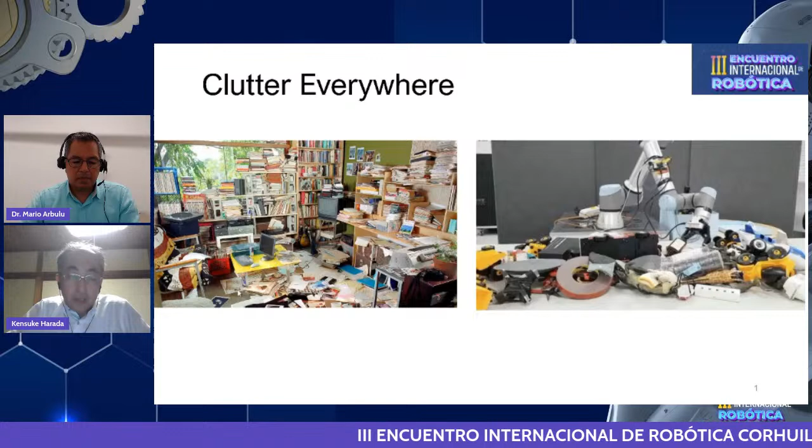Okay, so thank you very much for the kind introduction. It is my great honor to present in this conference. And today, I would like to present the robotic manipulation in clutter. And as we can see from this picture, there is clutter everywhere in our daily life. And if a robot is going to work in daily life, robotic manipulation in clutter will be a crucial technology.

And in this research, we especially focus on the industrial application of manipulation in clutter. And we can focus on two topics. One is in the assembly factory, and in the assembly factory, the parts will be delivered from the parts production company, where the parts are randomly stored in a container. Then the parts are supplied to the assembly cell. To automate the assembly process by a robot, the robot has to deal with picking parts randomly stored in the container.

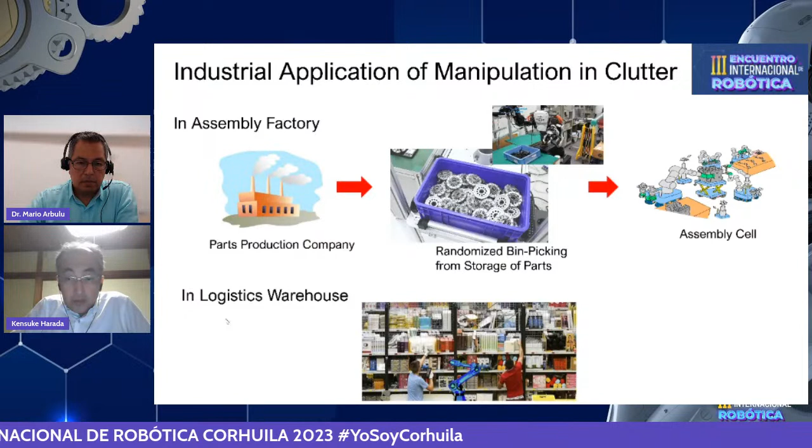And as a second example, we can focus on the logistic warehouse. In recent years, like Amazon, e-commerce is getting more and more common. And in a logistic warehouse, the items are stored in a shelf, and in many cases, the items are stored randomly on the shelf. And to automate the operation in a logistic warehouse, the robot has to deal with the clutter of items stored in a shelf. So this talk is divided into two parts. One is the clutter in the assembly factory, and the other is clutter in a logistic warehouse.

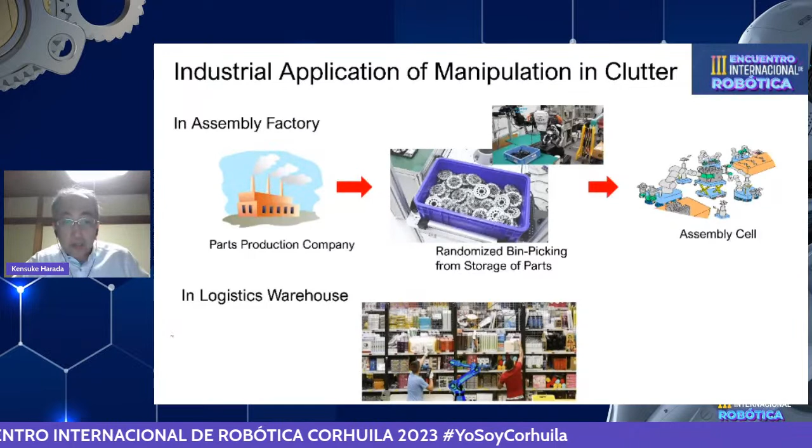And this is the contents of today's talk. In the assembly factory, we focus on picking mechanical parts from a container. And we explain three topics. One is learning action affordance to deal with entanglement. Second, we introduce a learning approach on picking wire harnesses. And third, we introduce the feedback approach on picking wire harnesses.

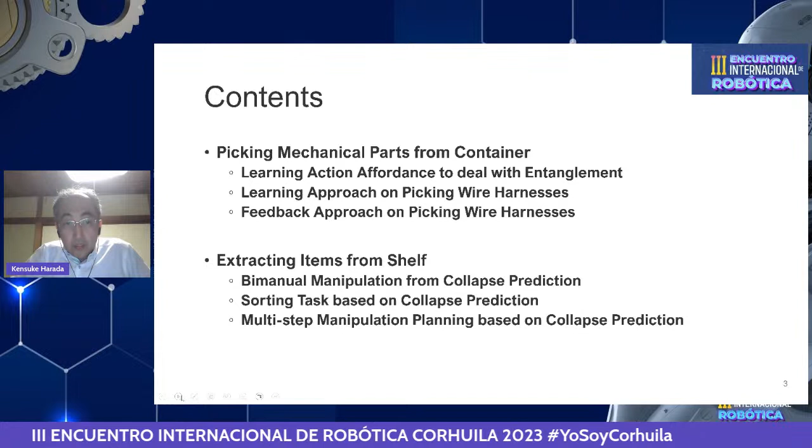And on the other hand, to extract items from the shelf, we first introduce the research on bimanual manipulation from collapse prediction. Secondly, we introduce the research on sorting tasks based on collapse prediction. And thirdly, we introduce the research on multi-step manipulation planning based on collapse prediction.

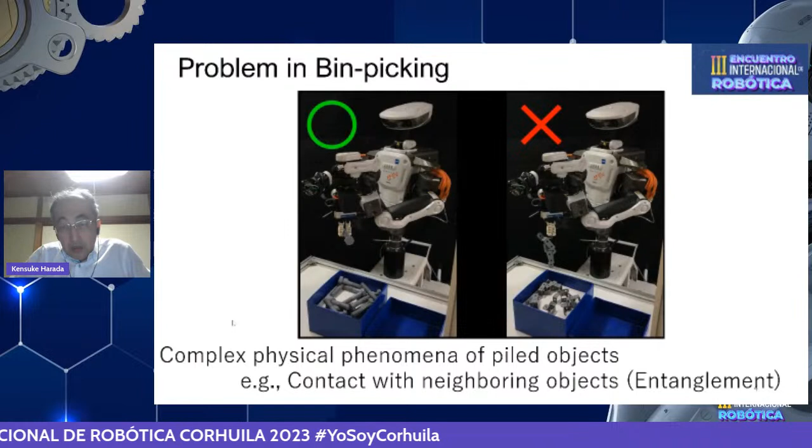And first, let me introduce what is the problem in robotic bin picking of mechanical parts. The physical phenomena of piled objects are very complex, and when a robot picks up a simple shaped object, there is no problem. But when the robot picks up a complex shaped object, the object may be entangled with the neighboring object. So to automate the bin picking task, we have to deal with the problem of entanglement.

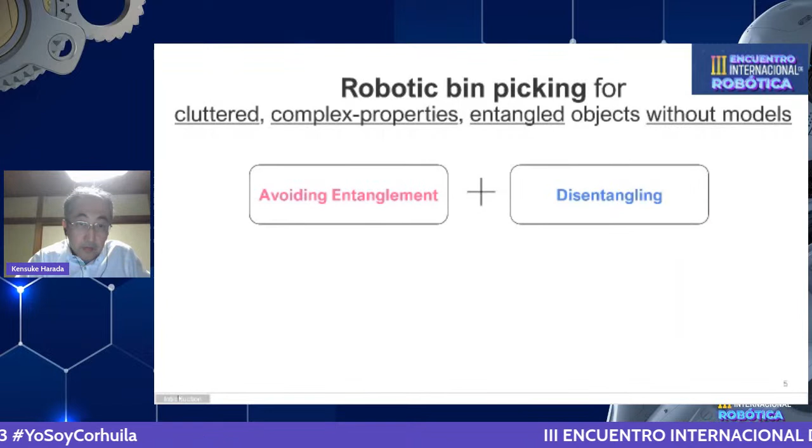So we can summarize the approaches of robotic bin picking considering entanglement. There are two approaches to deal with entanglement. One is to avoid the entanglement, and the other is to actively disentangle the entangled objects. And there are also two approaches: one is the analytical approach, and the other is a learning approach.

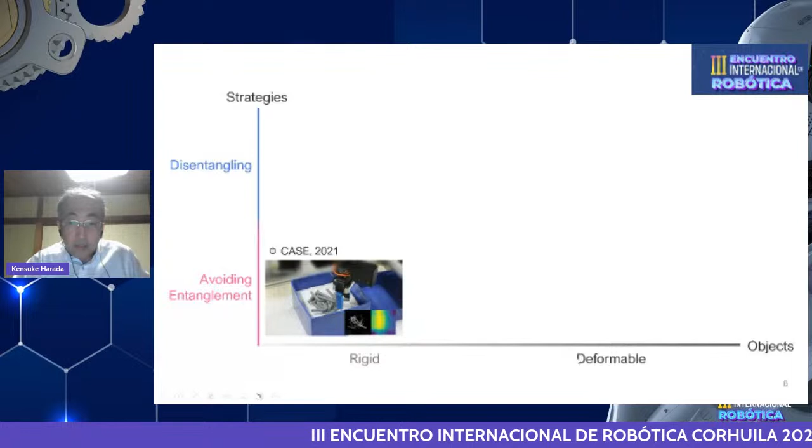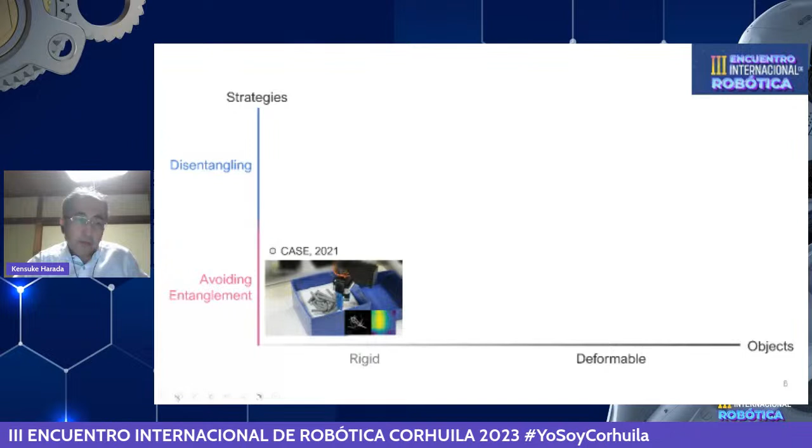And the approaches can be summarized like this. There are two axes. One is the axis on the objects, and the objects can be from rigid to deformable. And on the y-axis, there are two approaches. One is avoiding entanglement, and the other is the disentangling approach. And we have done several researches on these topics, and among these researches, we introduce three of them.

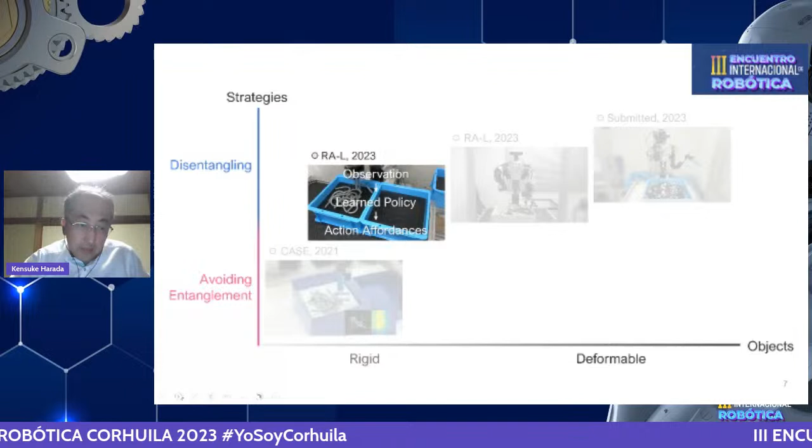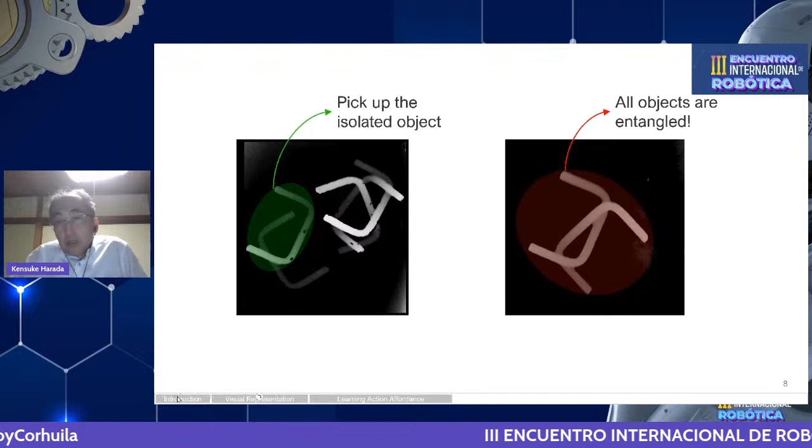And first, I would like to introduce the disentanglement approach for rigid objects. As shown in this figure, the robot can pick up an isolated object if there is one. However, if the robot iterates picking isolated objects again and again, and there is no isolated object, the robot has to pick up an object entangled with other objects. So in this case, the robot has to actively disentangle the entangled object.

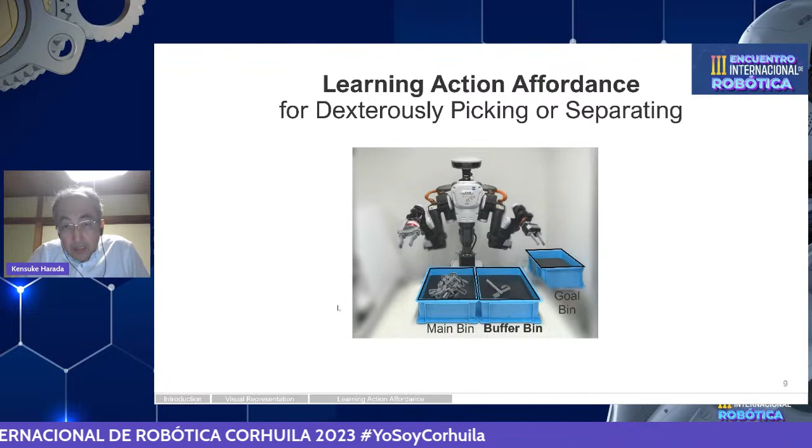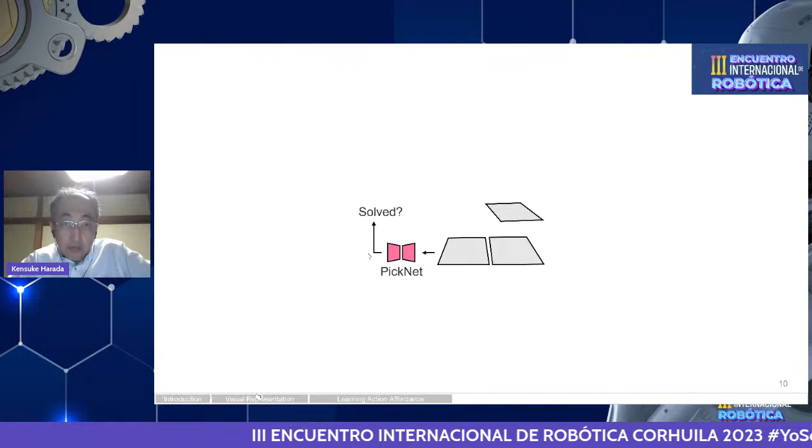So this slide shows our proposed approach. The robot has to pick an object from the main bin, and there are two other bins. One is the goal bin, and the other is the buffer bin. First, the robot picks an object from the bin. Then, by using PickNet, we can estimate the entanglement. If the entanglement is solved, the object is placed in the goal bin. On the other hand, if the entanglement is not solved, the objects are placed in the buffer bin.

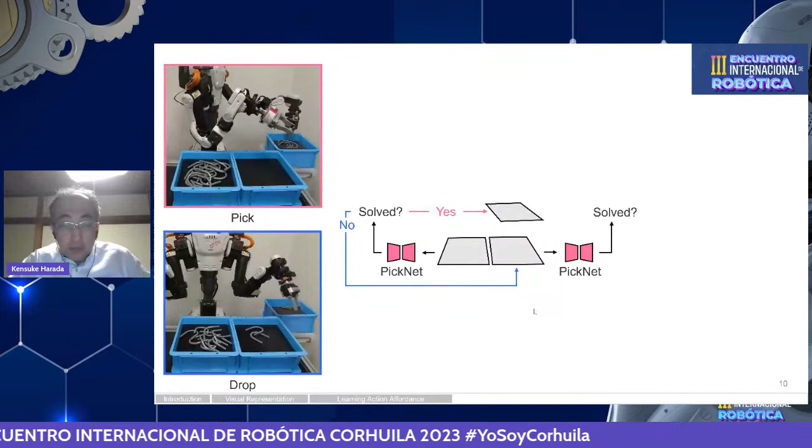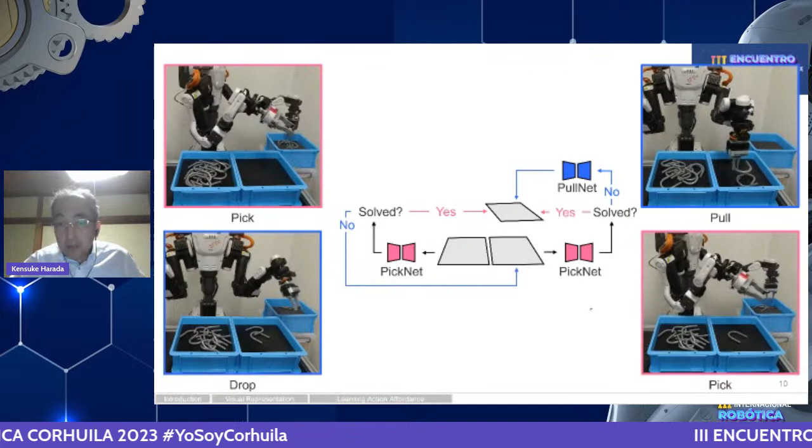In this case, once the object is put in the buffer bin, if the entanglement is solved, then it is put in the goal bin. Otherwise, the robot actively disentangles the tangled object. And this is how to train the neural network. We use physics simulation, and there are two kinds of simulation. One is the picking simulation, and the other is the disentangling simulation.

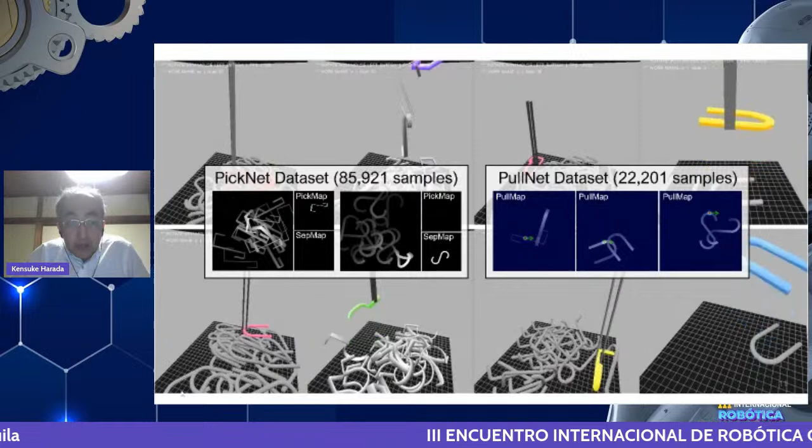And we prepared 85,000 samples for the PickNet, and we prepared 22,000 samples for the PullNet. I'm sorry, the PickNet is the neural network to avoid the entanglement, and the PullNet is the neural network to actively disentangle the entangled objects.

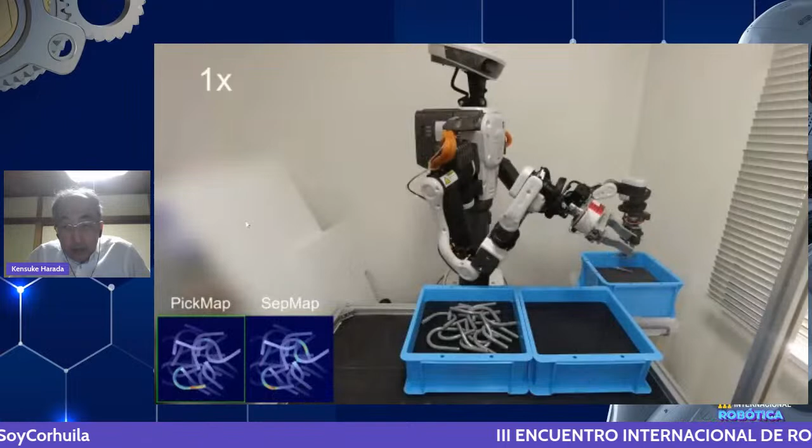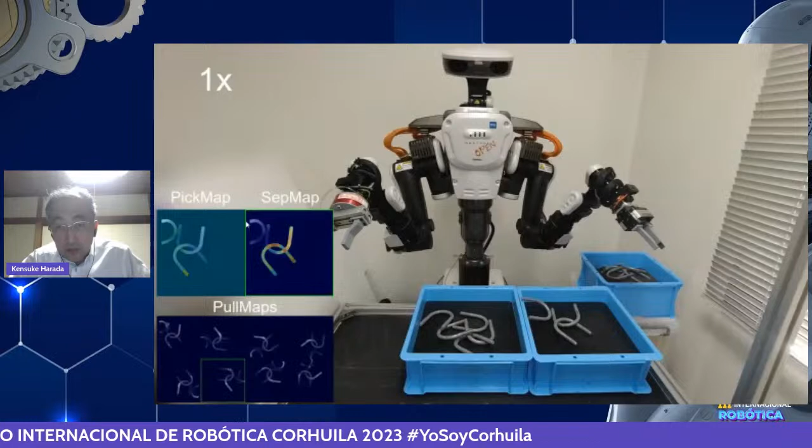And this is entangled, and the entanglement is not solved. Then the robot tries to actively disentangle the tangled objects. And then one of the objects is put in the goal bin. Okay, so we can achieve a pretty high success rate. It is almost 90%.

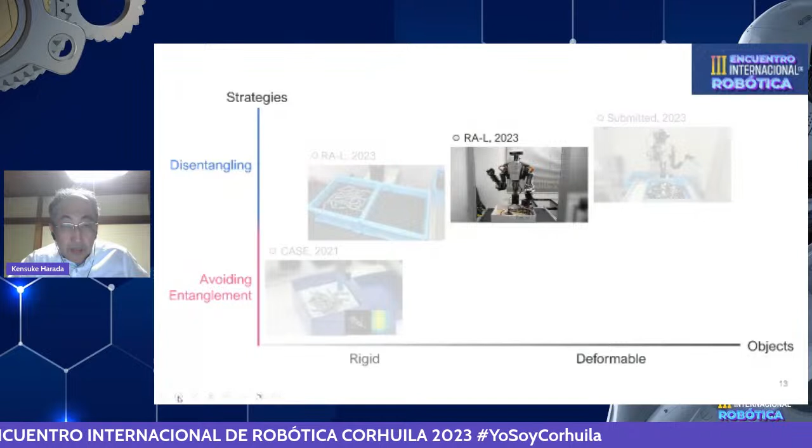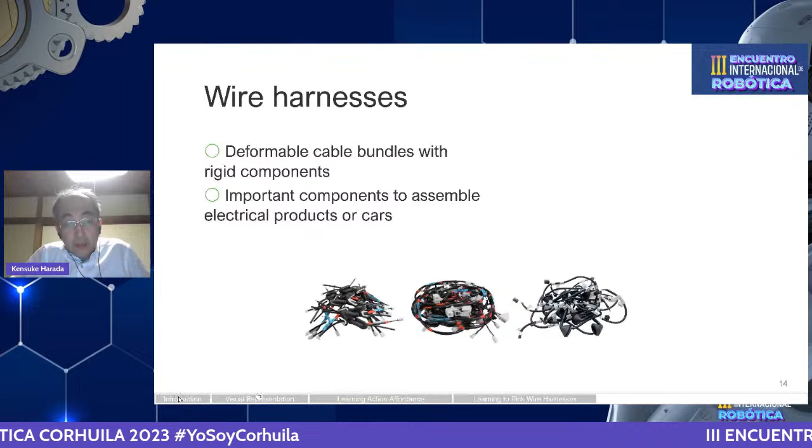Then I would like to present the disentangling approach for deformable objects. So we especially focus on wire harnesses. This is the cable used to assemble a car, and usually deformable cable is bundled with rigid components, and it is an important component to assemble electrical products or cars.

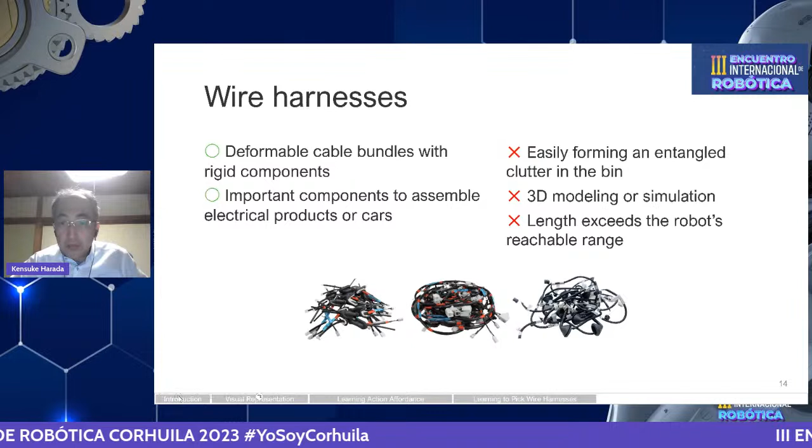But this wire harness is easily entangled, and it is stored cluttered in the bin, and it's very difficult to model the shape of the wire harness, or to simulate the physical phenomena of the wire harness.

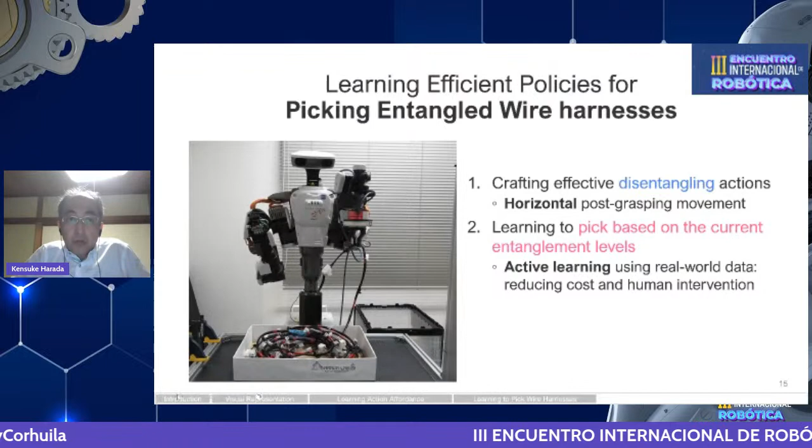And in this research, we try to learn efficient policies for picking entangled wire harnesses. We consider crafting effective disentangling actions, horizontal post-grasping movements, and in the approach, we consider learning to pick based on the current entanglement levels. We use active learning using real-world data, and it reduces the cost and human intervention.

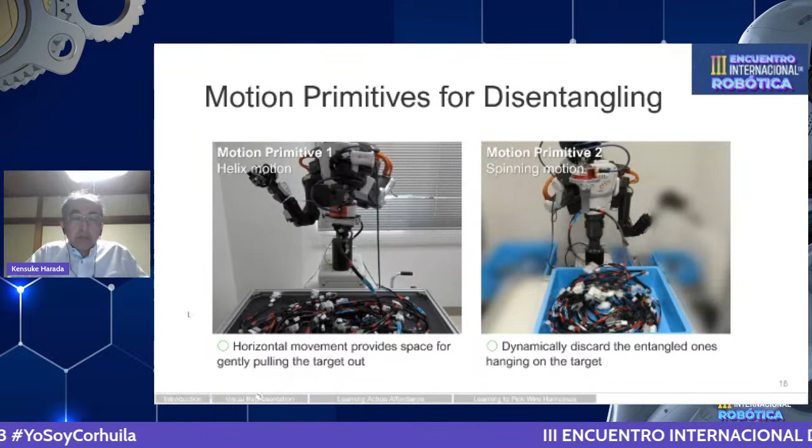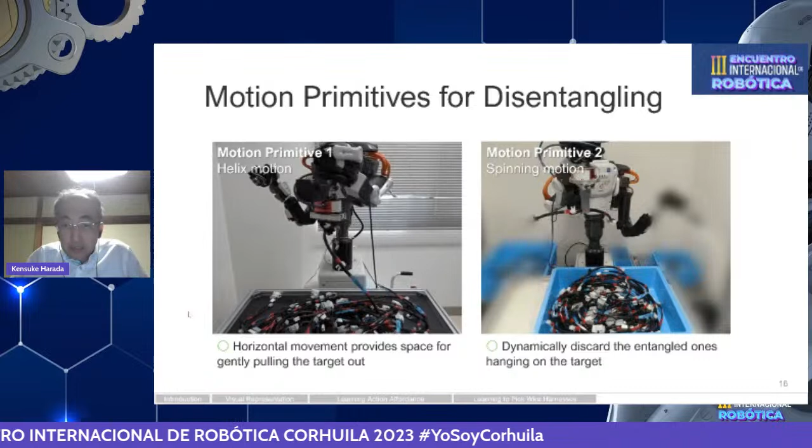And this video shows the motion primitives for disentangling. We assume two motion primitives. One is a helix motion, and the other is a spinning motion. In the helix motion, the horizontal movement provides a space for gently pulling the target out. And in the spinning motion, it dynamically discards the entangled ones.

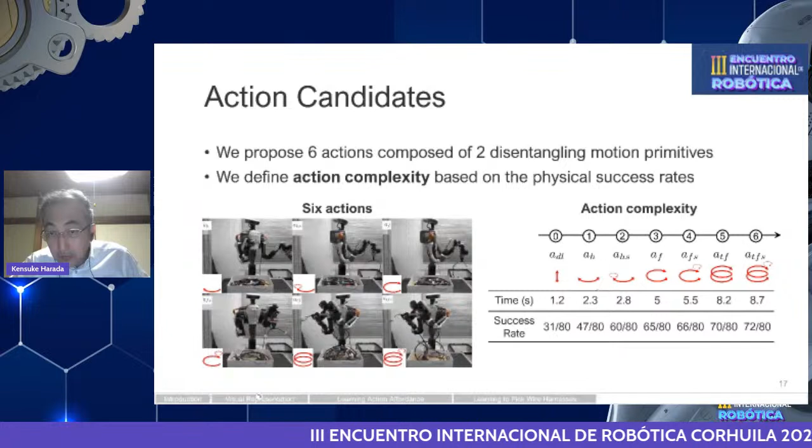And we assume 6 action candidates. So in the helix motion, we assume a half circle, 1 circle and 2 circles, accompanied with spinning motion or not.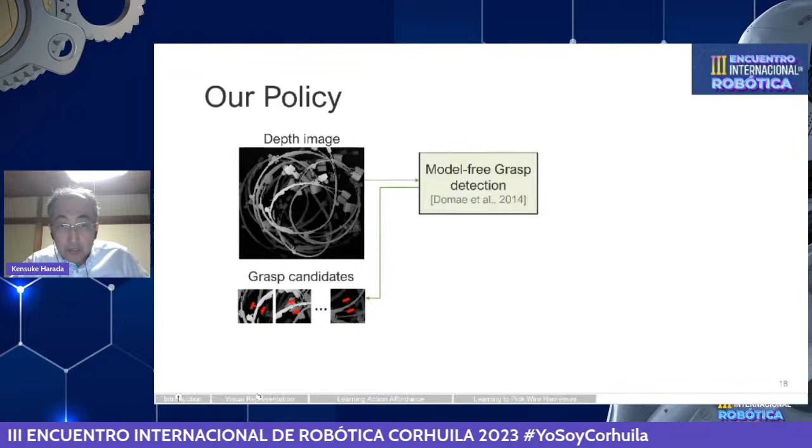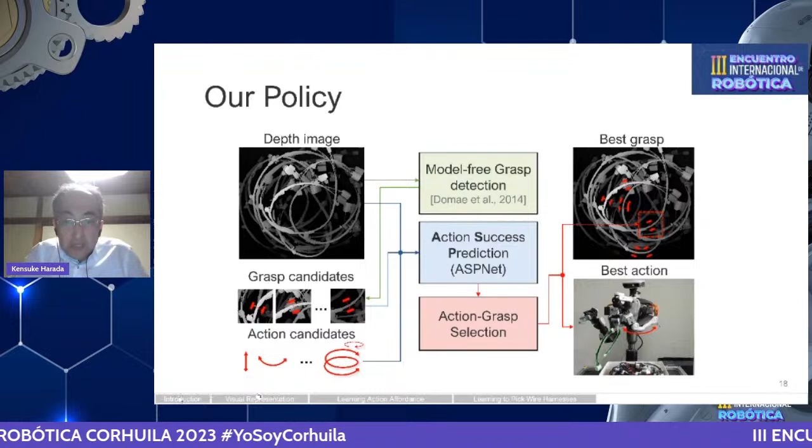And this shows the proposed approach. First, by using the depth image, we use model-free grasp detection to detect the grasping pose. Next, for a given grasping pose, we use the neural network to predict the action success rate. Then, according to this action success prediction, we select the most appropriate action.

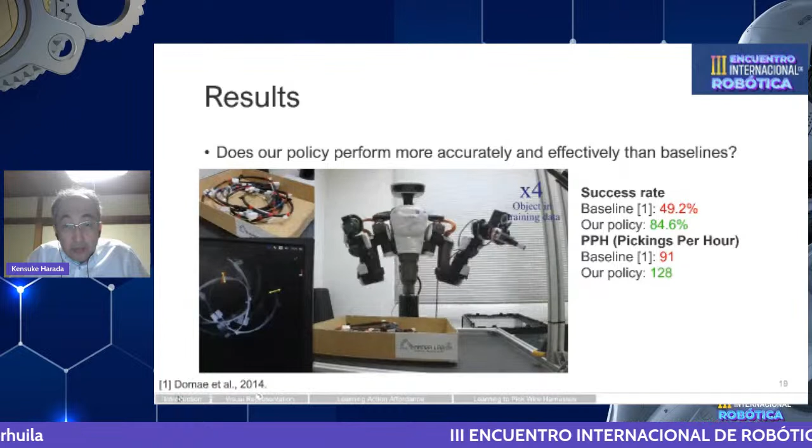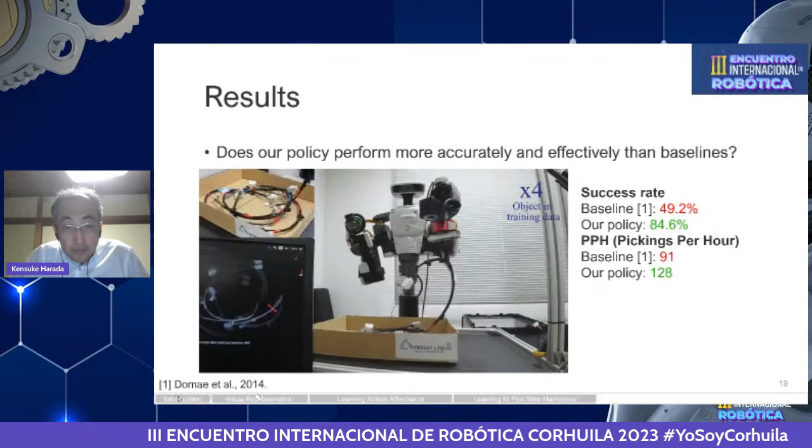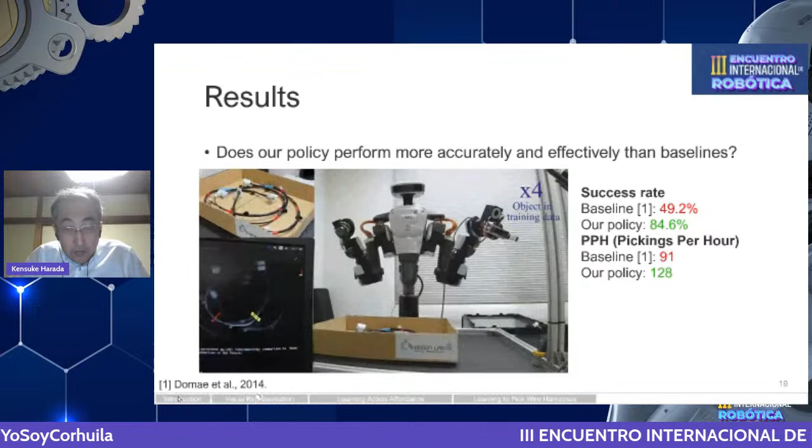So this shows the experimental result. So this is the 2 circles accompanied by spinning motion. This is also 2 circles without the spinning motion. And like this, we can achieve a success rate of almost 85%.

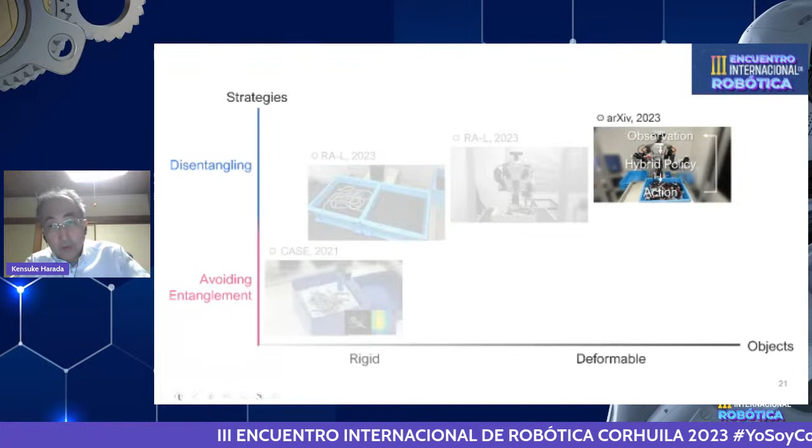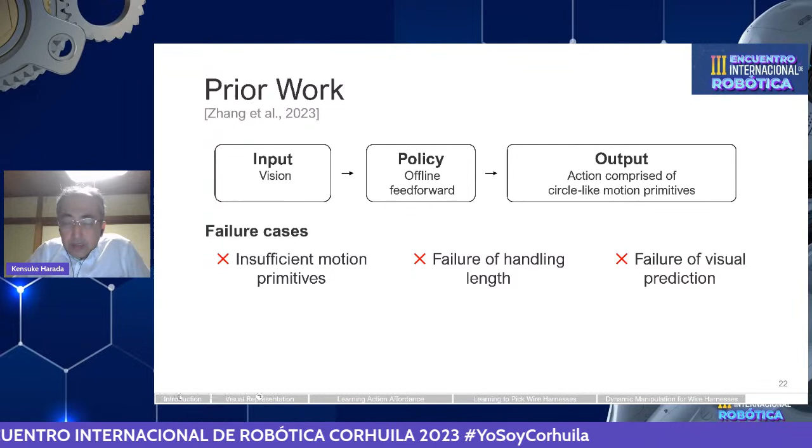And finally, I would like to explain the feedback approach for disentangling deformable objects. In the previous work, there are some failure cases caused by insufficient motion primitives. Also, the previous approach does not deal with failure cases, and it is impossible to realize the failure of visual prediction.

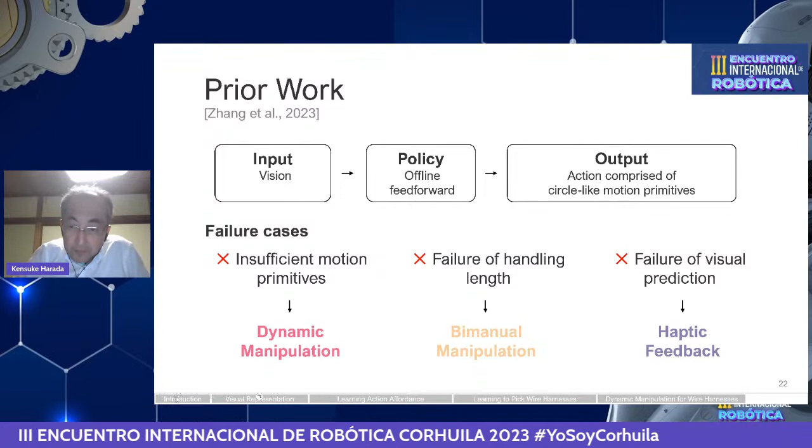So on the other hand, in this approach, we propose a method based on dynamic manipulation and more efficiently realize the disentangling. We also propose bimanual manipulation to deal with the failure of handling the length. And not just using the visual prediction, we also use haptic feedback to deal with the failure cases.

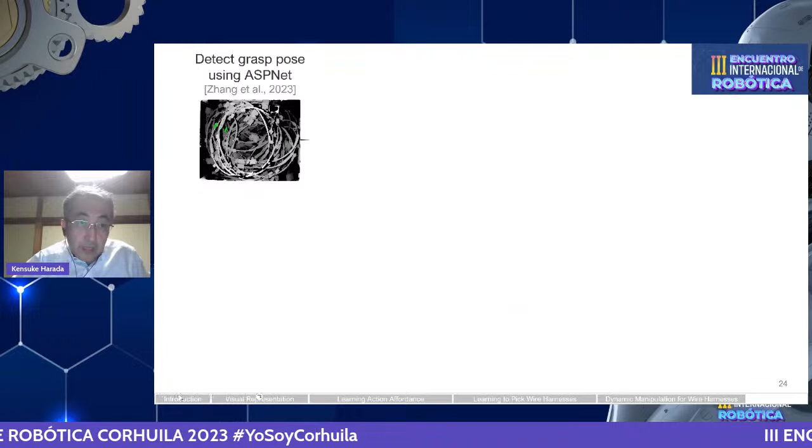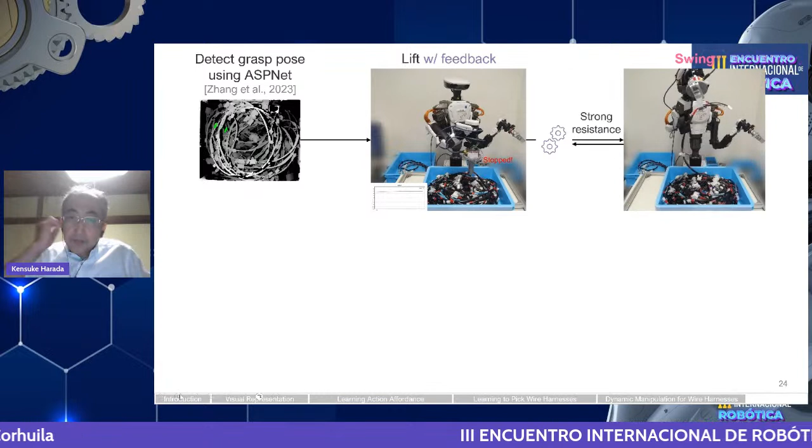And this is the proposed approach. We first detect the grasping pose and then try to pick up the object. While picking up, we monitor the force sensor information of the wrist. If the entanglement is detected, the motion is stopped, and then we try the swing motion. This is the dynamic manipulation.

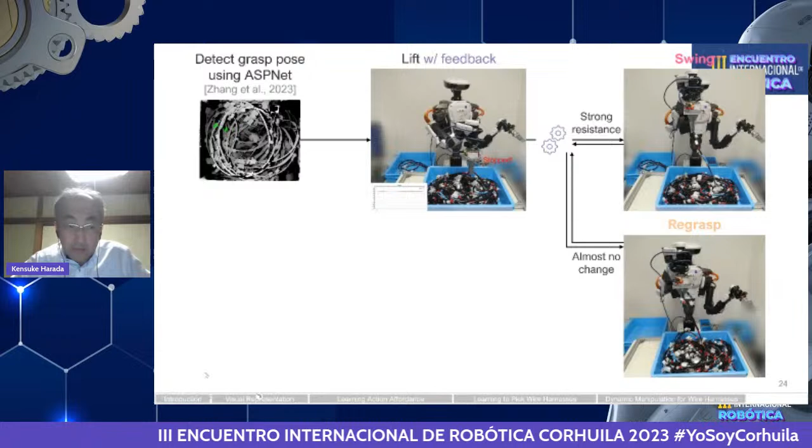And if the force sensor information does not change so much, we use bimanual manipulation to extract the objects from the bin. Then the robot tries to put the wire harness in the goal bin. But in this case, if the entanglement occurs, then it goes back to the first phase.

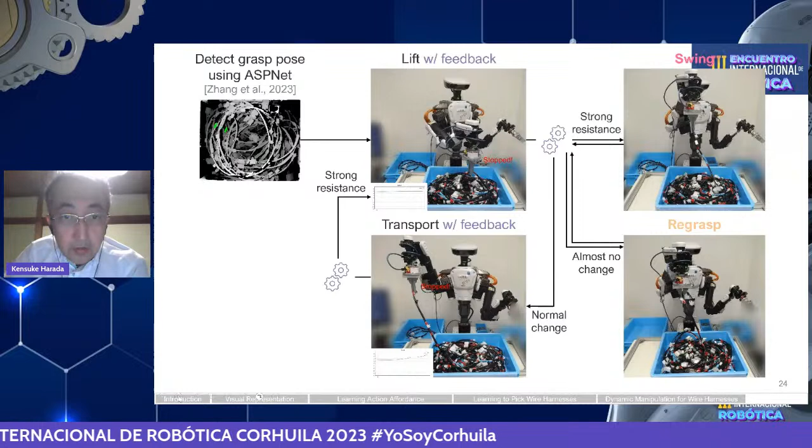And this shows the experimental results. So now the robot tries the swing motion. And then after the swing motion, the robot uses bimanual manipulation to extract the objects from the bin.

And the success rate of our approach is very high. For the object on the left-hand side, we achieved a success rate of 87%. On the right-hand side, we use a very long object. So even for the very long object, we realize a success rate of almost 80%.

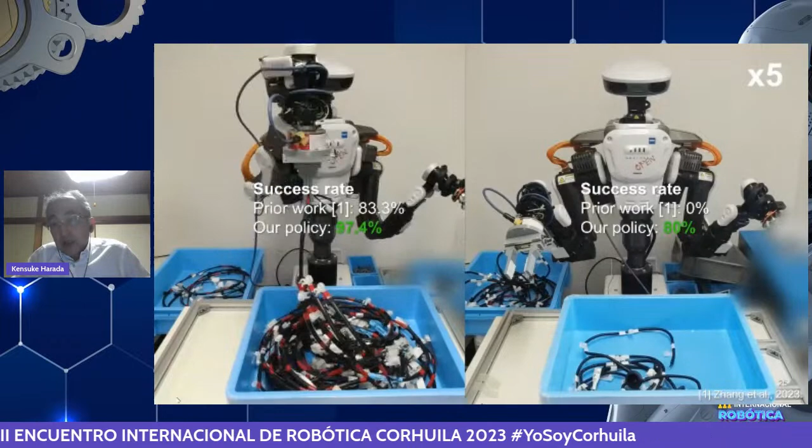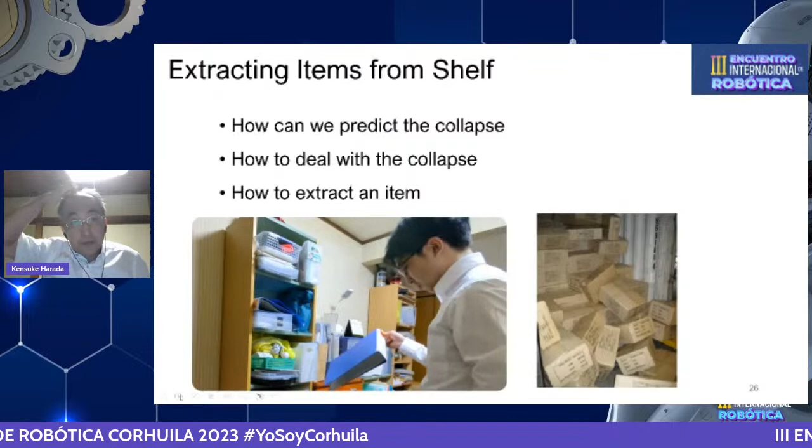Then let me move on to the second topic, extracting items from the shelf. As we can see from this video, without caring so much, when extracting the item from the shelf, other items will go out from the shelf together with the target one. So to cope with this problem, it is important to predict the collapse, and also to consider how to deal with the collapse and how to extract an item from the shelf.

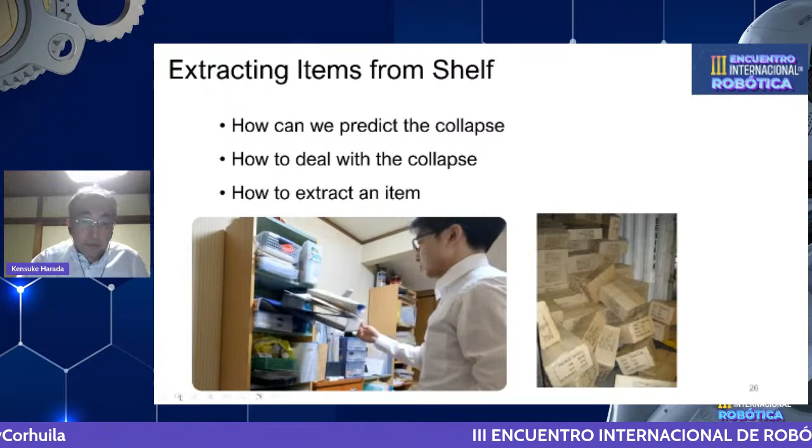We performed three researches. In the first research, we proposed bimanual manipulation, where one hand supports the neighboring items, and we use the other hand to extract the target one.

This manipulation is enabled by using the collapse prediction.

In the second research, we propose the sorting task planner based on the collapse prediction. Different from the first one, we try to insert new items into the shelf. This task has been done along with the collapse prediction.

In the third research, we propose scene analysis. Based on the collapse relations and direction of collapse, we can construct a graph showing the collapse relations. Based on this graph, we propose the multi-step manipulation planner to extract an item from the shelf.

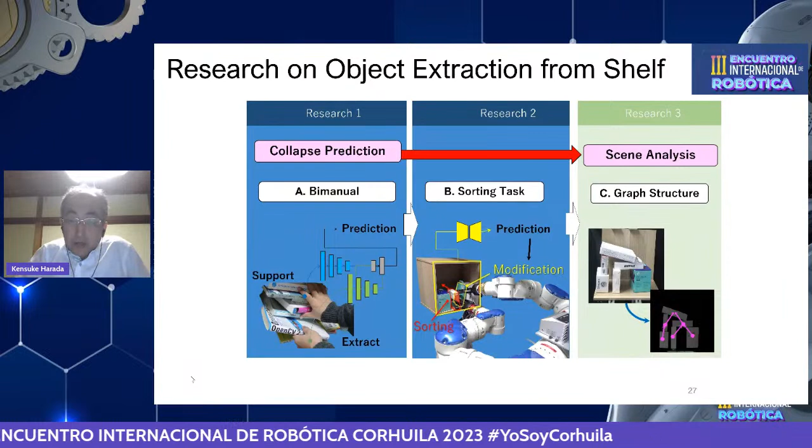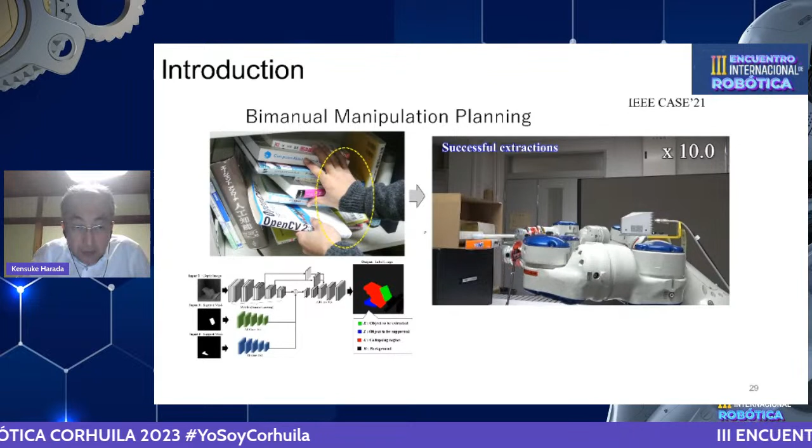Let me introduce the first research. As I explained in the previous slide, we use one hand to extract the target item, and the other hand to support the neighboring items.

We propose the collapse prediction based on deep learning. Based on the collapse prediction, we determine which object to support and which to extract the target item from the shelf.

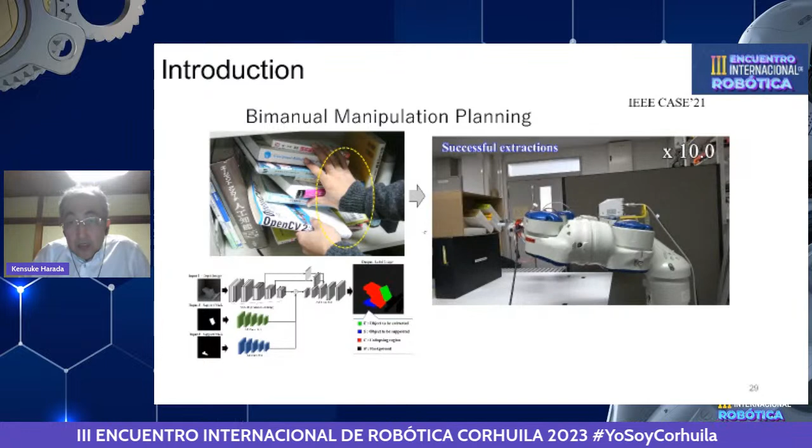This slide shows the overview of the collapse prediction. We propose the collapse prediction network by using the autoencoder.

As shown in this slide, there are three inputs: one is a depth image, the second is a supported object, and the third is the extracted object.

The result is expressed as a heat map showing whether the piled object will collapse or not.

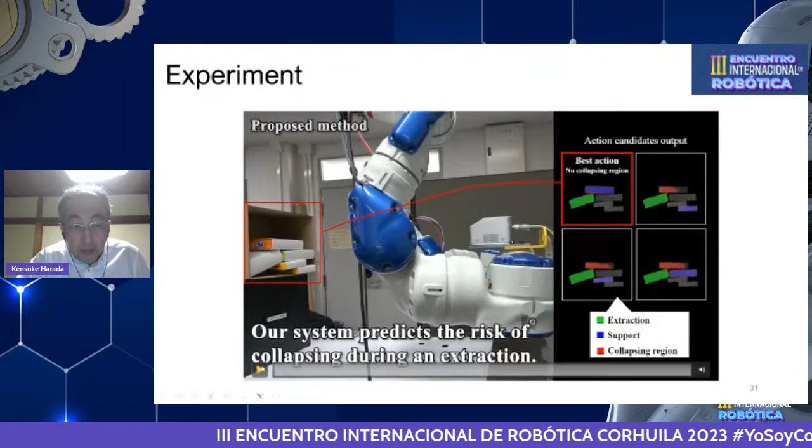This slide shows the experimental results. First, we obtain the point cloud, and then by using the collapse prediction network, we determine which object to support and which object to extract.

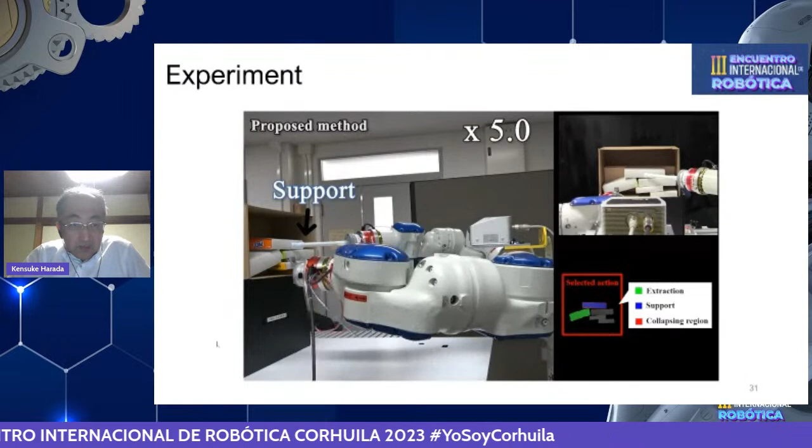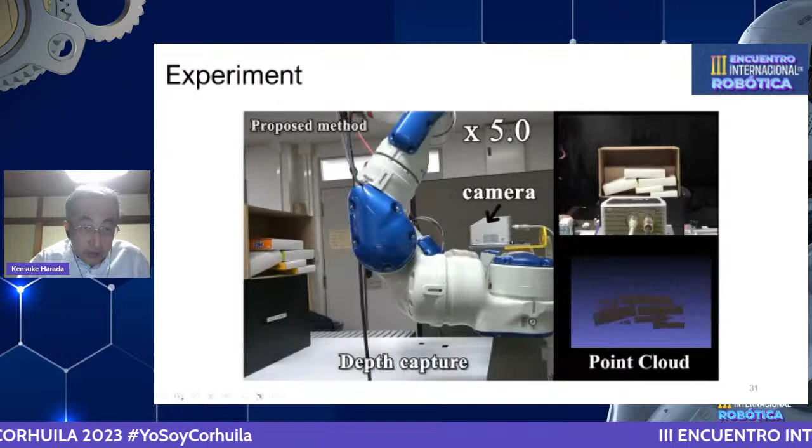Like this, the robot can successfully extract the target object without collapsing the pile in the shelf. This is another experiment.

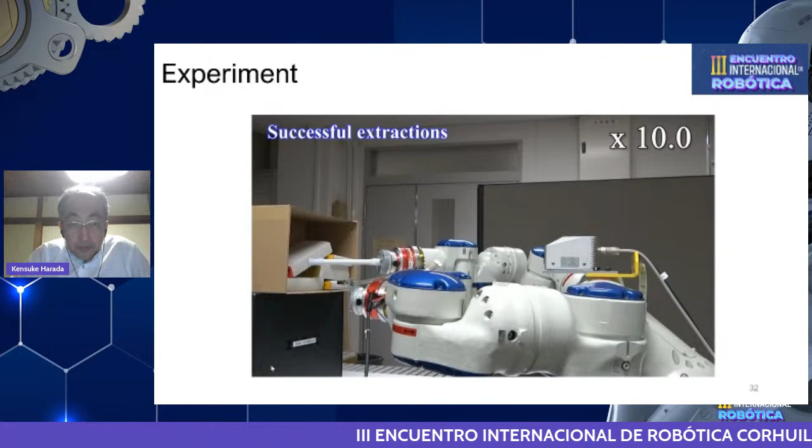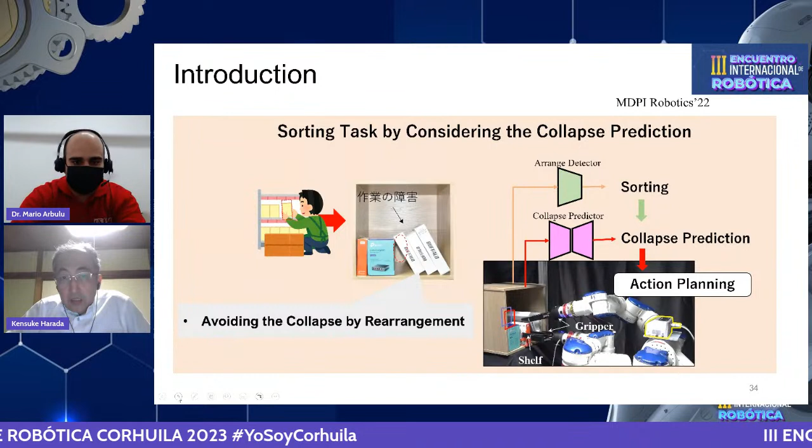Let's move on to the next topic, the sorting task planner. We use the collapse prediction, and we first use the arrange detector to identify the arrangement state.

Then we determine how to sort the next item to the shelf. When sorting, we use the collapse prediction to stably insert the target item into the shelf.

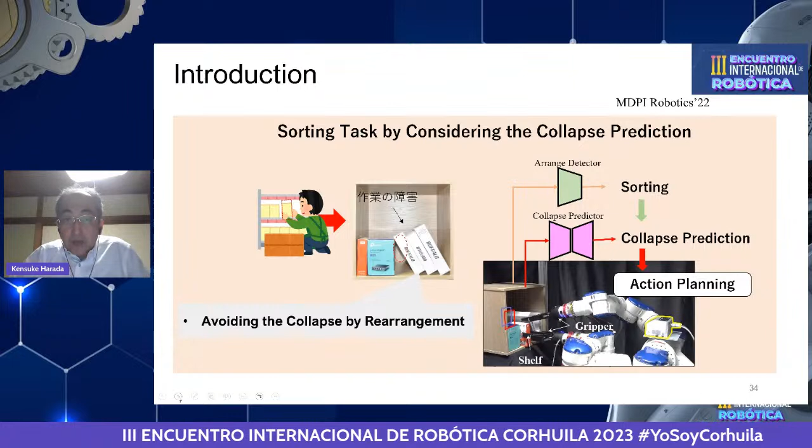This slide shows the overview of the method. First, we analyze the state of the items: whether they are arranged vertically, horizontally, or otherwise.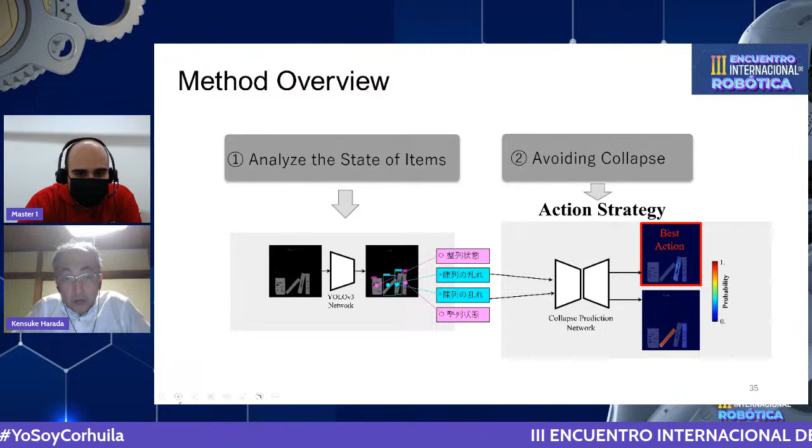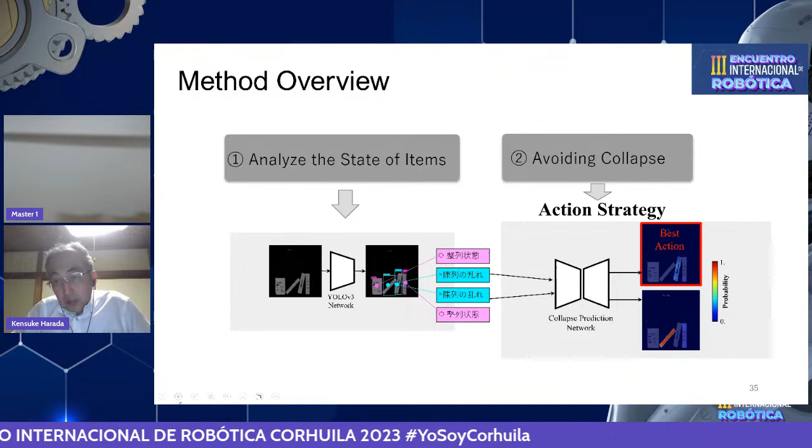According to the state, we assume the manipulation strategy to insert an item into the shelf. When inserting the item, we have to avoid collapse, so we use the collapse prediction network to predict the collapse of the piled objects.

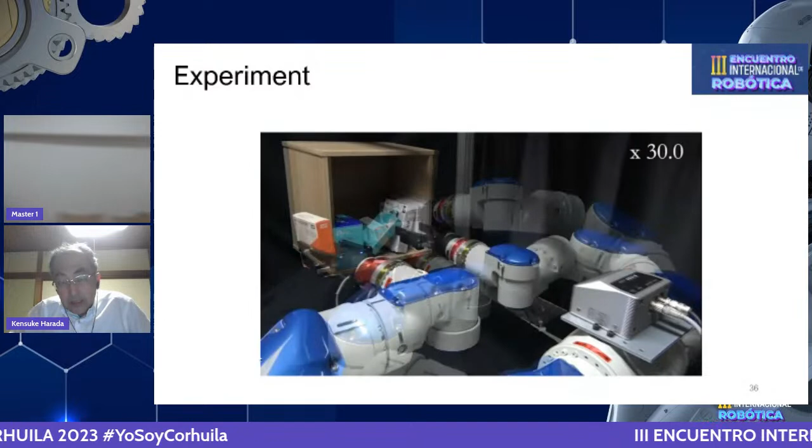This shows the experimental result. First, the state of the object is analyzed, and then the next object is inserted into the shelf.

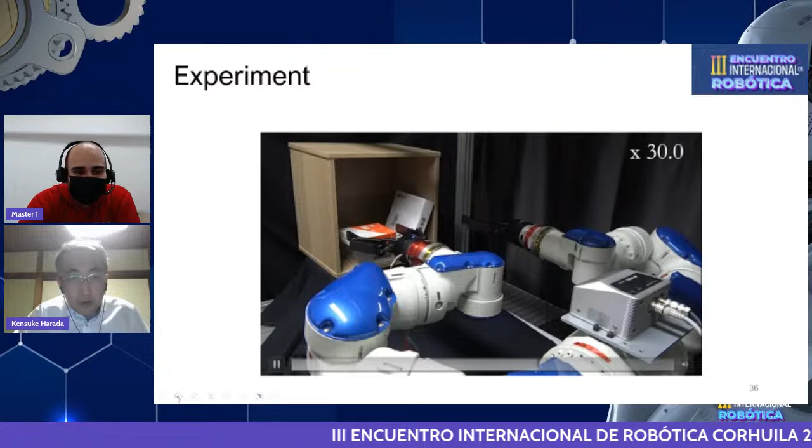Okay, Mr. Kensuke, we are running out of time. Time is up. I'm sorry. No problem, we're almost ending. Thank you very much.

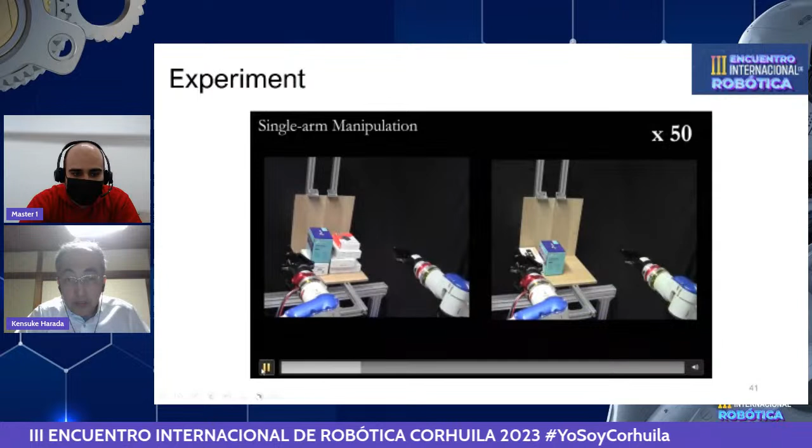And this is the end of my talk. Thank you very much.

Hello, okay, Mr. Kensuke. Thank you for your participation today. This conference was of great importance to our participants.